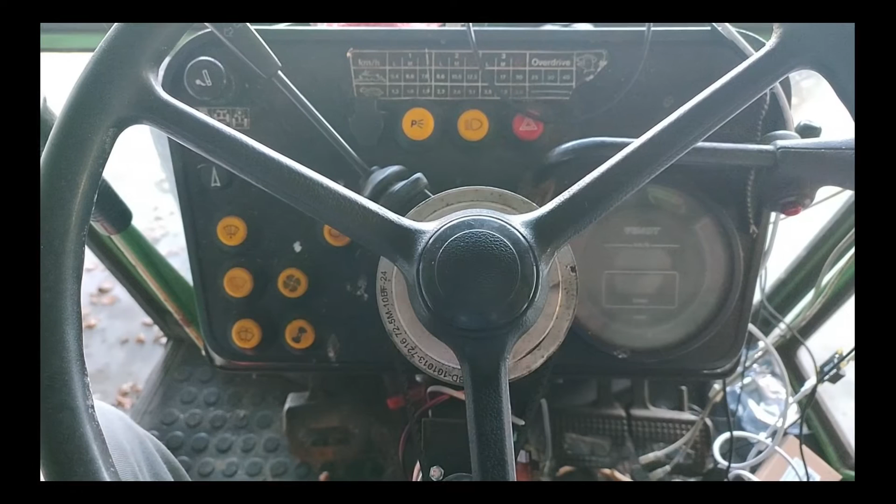Welcome to this tutorial for making a 3D printed gear for both CerealGPS and AgOpenGPS. The first thing I'm going to do is remove the steering wheel. This way it's easier to make the dimensions and later install the gear. As you can see, I've got a belt system in place right now, which also works great, but for this tutorial I'm going to make some 3D printed gears.

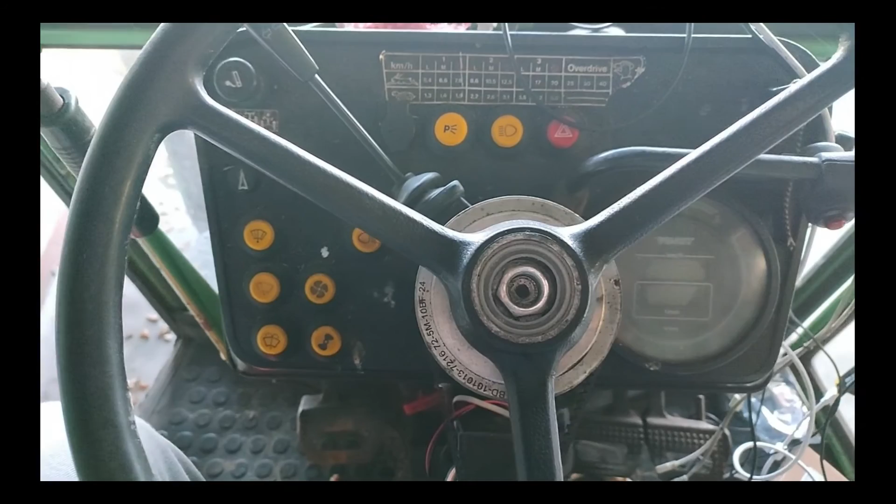The first thing to do when removing the steering wheel is removing the bolt in the middle, so that's what we're going to do. So here's the bolt. After removing the M32 bolt of the steering wheel, it's quite easy to remove the steering wheel. You can just pull it off. I already loosened it a little bit, like this. And now we've got our steering wheel removed.

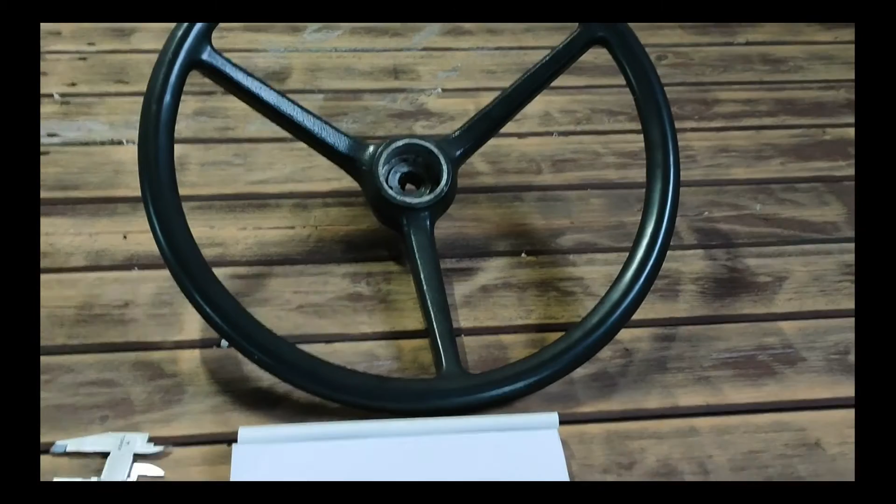So here we are again. We've got our steering wheel on the workbench. You can probably hear some 3D printing noise in the background - that's what you get when you do some 3D printing, I suppose. In order to measure the steering wheel, we've got a measuring tape and some calipers here. So the first thing we're going to do is measure the diameter of the steering wheel.

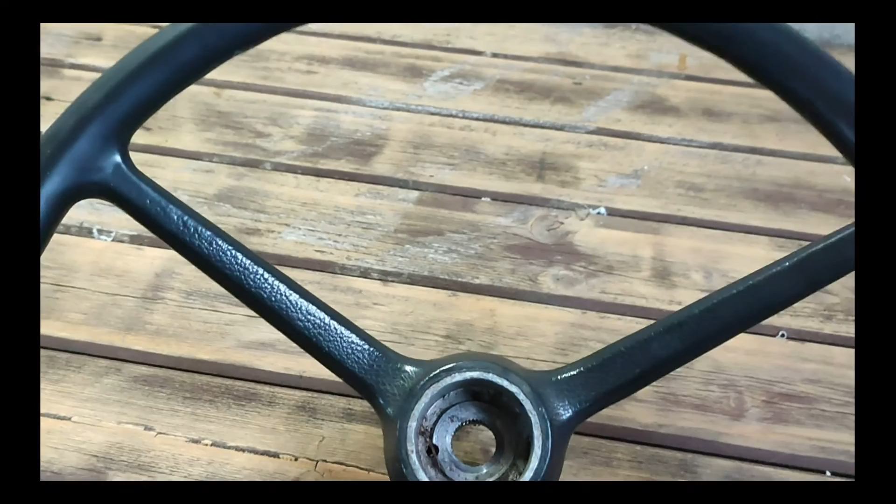You kind of get the idea what I'm going to do, and after that I make a drawing here on this piece of paper. So we can see that the outer diameter of the steering wheel is 40.5 centimeters.

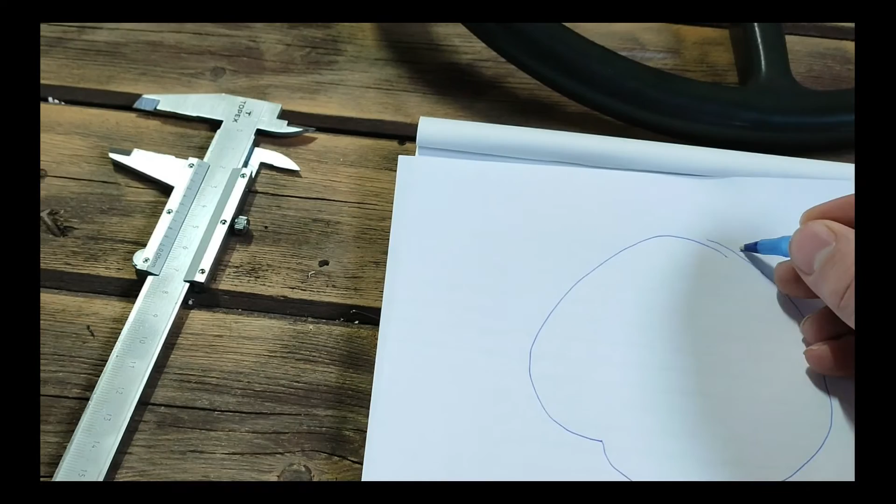So first what we'll do, we draw a big circle. I'm not a good drawer, as you can see. I'll just make it here and say 40.5. The diameter of the steering wheel isn't really important, but it's nice to have it - that way it gives you a good indication of how the gear is going to look after it's finished.

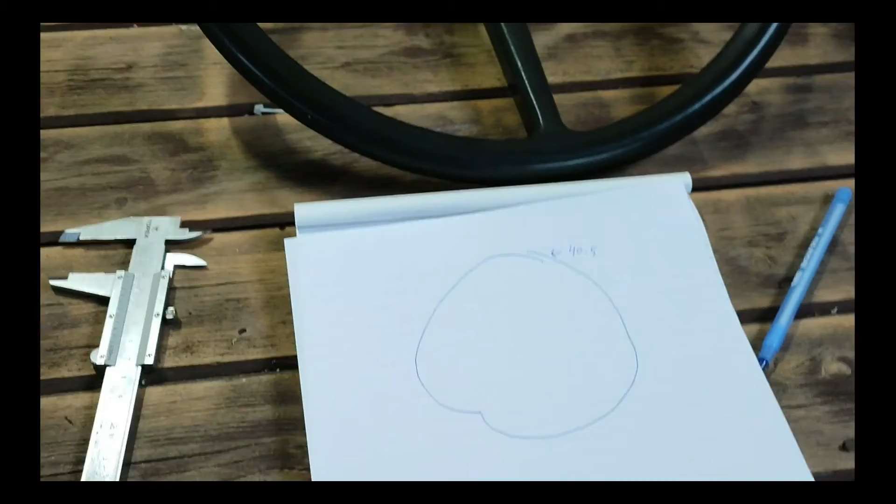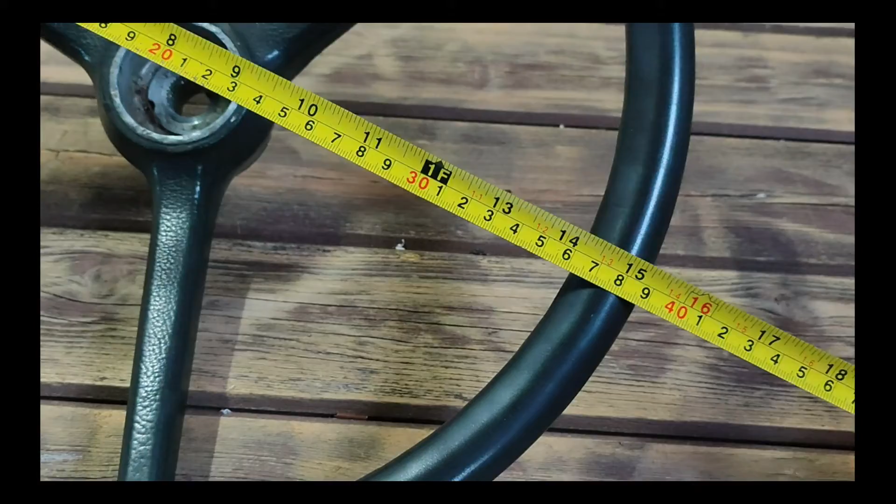So the inner diameter of the steering wheel is, let's measure that next. Let's see... 35.5. So the inner diameter is 35.5. Okay, we write that down.

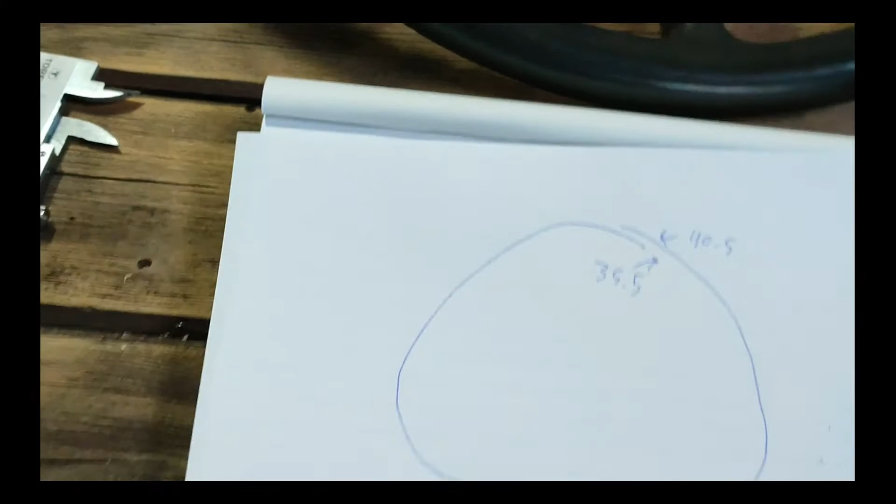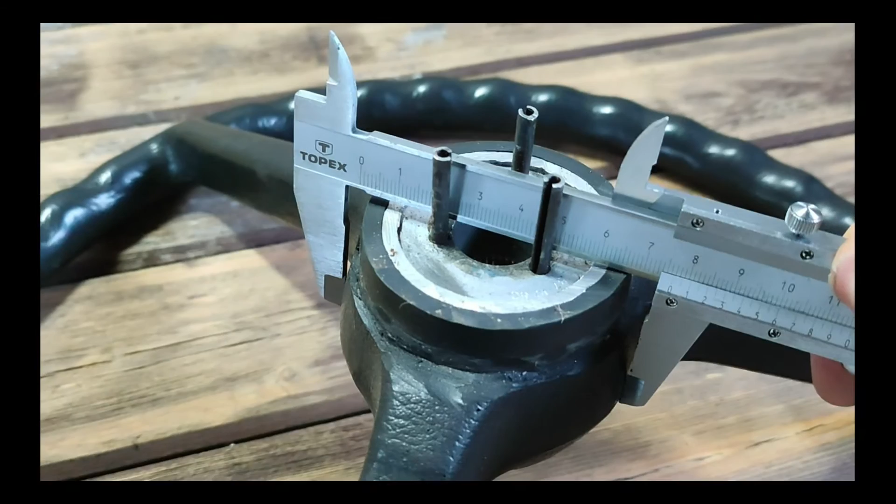So next thing we're going to do is draw the spokes of the steering wheel. This steering wheel has 3 spokes, and in the middle it has this cylinder shape. We're going to draw that in as well. I think it's best to measure it with the calipers. So if I put the caliper around it, it's easier to put it the other side around. I'm going to do a measurement. And here we have it - if I do the reading, 7.4 centimeters diameter. Okay, we're going to draw a circle in here.

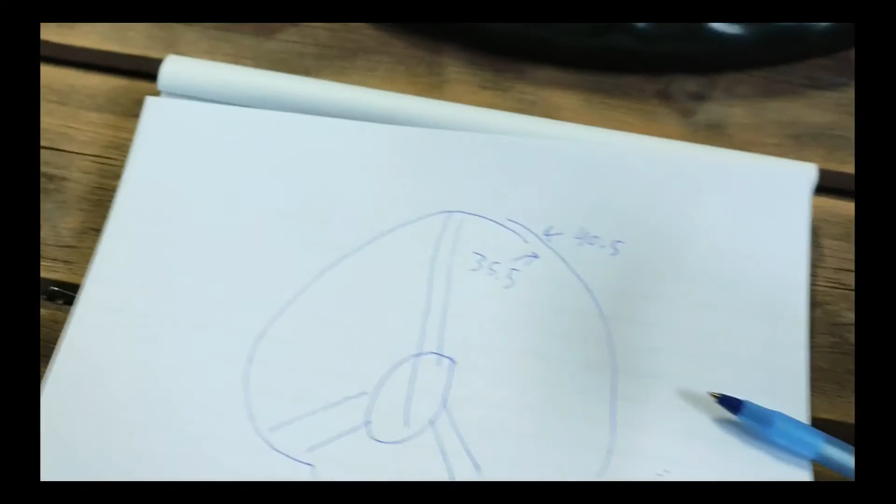Excuse me if it looks a little bit messy, but it's hard for me to film and do the drawing at the same time. So we've got our measurement here - it's 70... let's see... 74, okay.

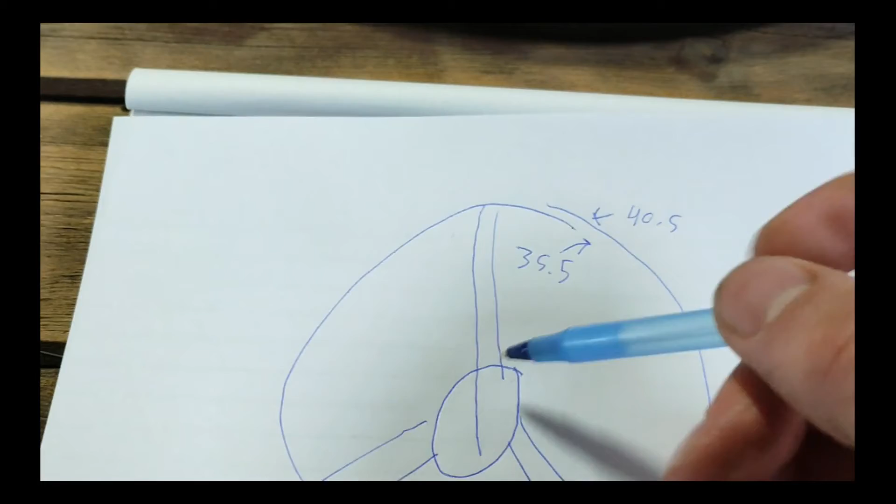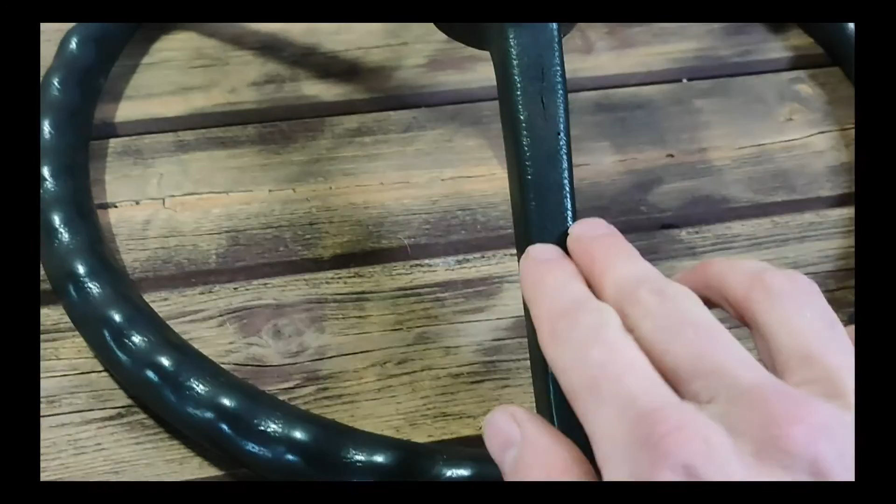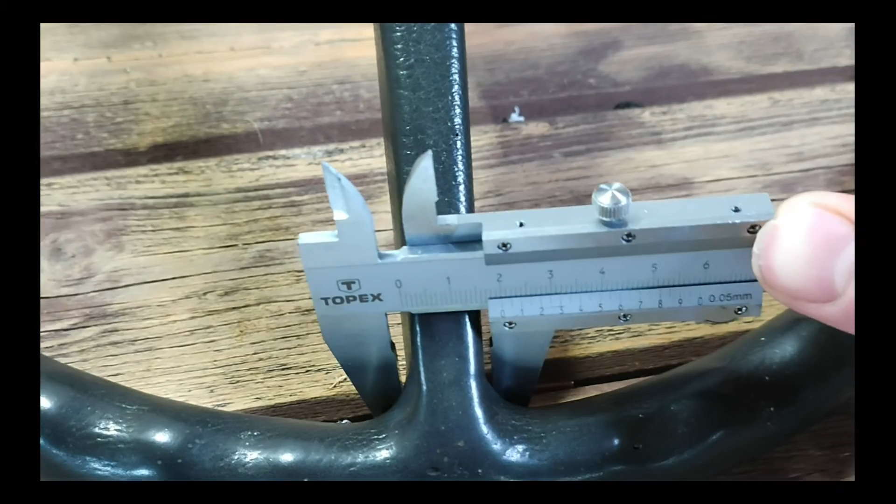Now what we're going to do is the width of the spoke - if we take a look at the steering wheel, we can see here on the top it's wider, and it goes smaller at the bottom, so it's kind of a triangle shape here. So what I'm going to do is measure the top. It's 2.5, and at the bottom it goes down to 1.5. So it fits in 1 centimeter, okay? So 2.5, 1.5. So at the top it's...

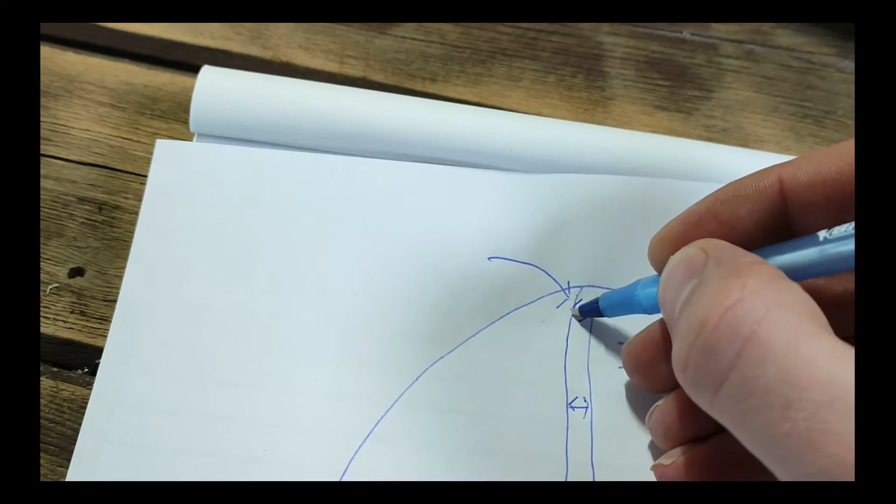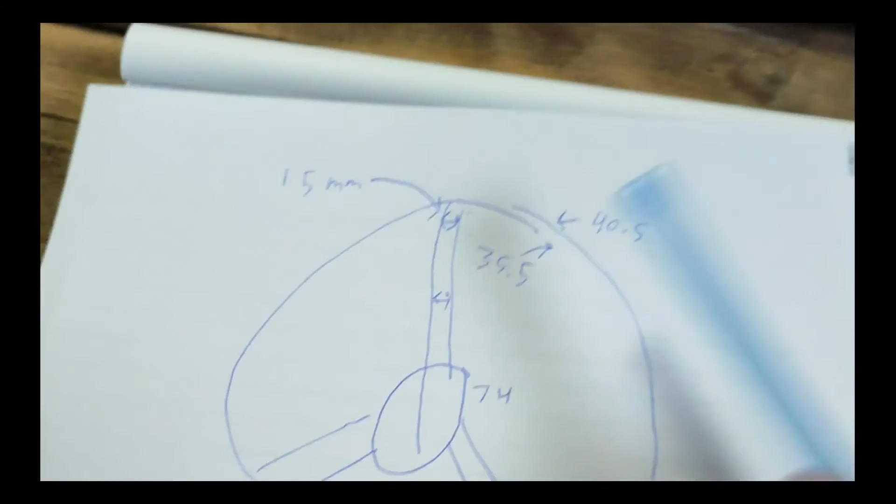This is not the official way to do a mechanical drawing, but it really is the most easy way. I also use two measurement types - I have centimeters and millimeters, but you probably know it. I can also write it next to there. So okay, so then we've got the bottom here - this is 25 millimeters.

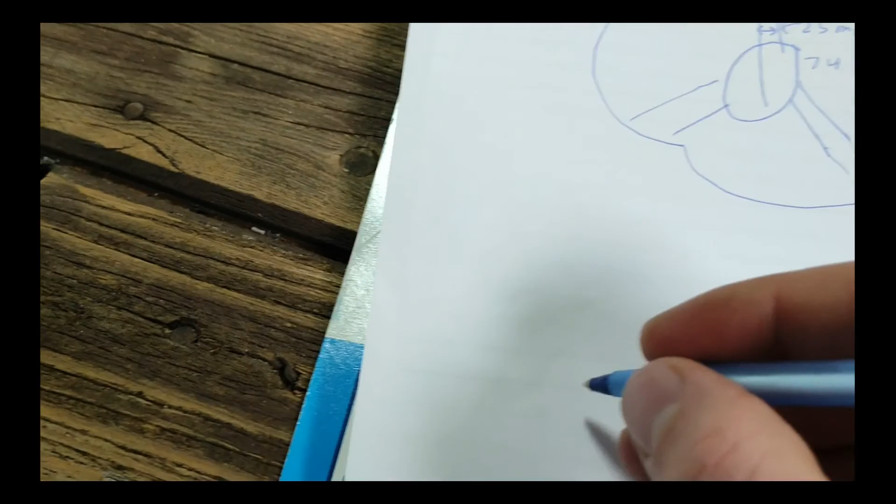I mean millimeters, okay? So in order to measure the angle, we do the following. We have the thickness of the grip, and I put my caliper around there. If we read the thickness, it is 2 centimeters, okay? So we're going to draw a triangle here, going down, and then here we have this thing, and that's 20 millimeters, okay?

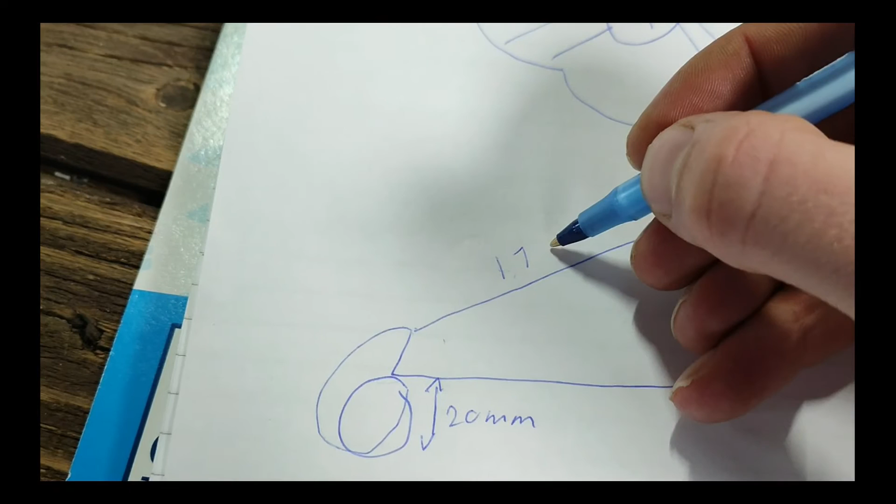In reality, this would be flat, so it would be more like this, okay? And we have this measurement - it's 170 millimeters, okay? And then we need to know this height, okay? It connects like this on top, it flattens out here, and then we want to know this height, and we can calculate the angle, okay?

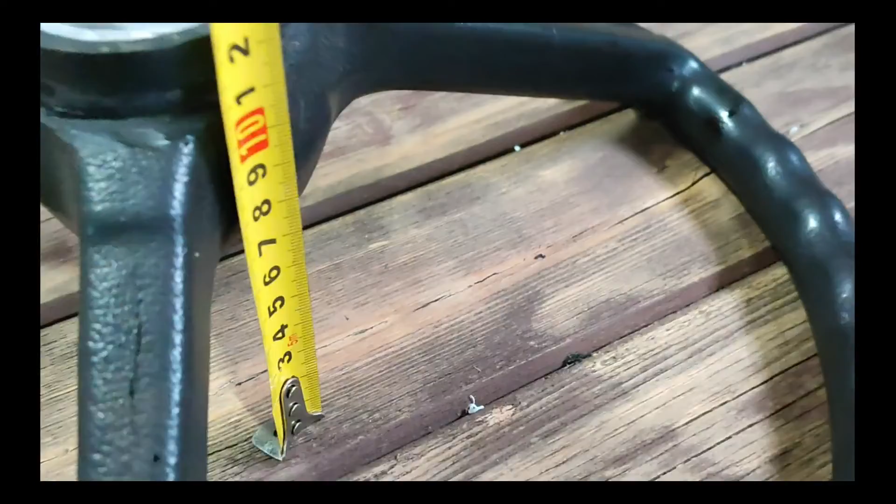The height of the steering wheel is 10.5 centimeters. So, 105 millimeters. Okay, so now we took all the measurements of the steering wheel that we required.

If you removed the steering wheel from the tractor, you can also take it to your desk when making the drawing for the gear. But removing the steering wheel isn't necessary, you could also do it without. But then you have to make more complex gears that connect together in multiple pieces, because otherwise you wouldn't be able to fit it around the steering wheel.

So it is also good to understand the smaller gear. We have one gear on the steering wheel and the other gear is on the motor, obviously.

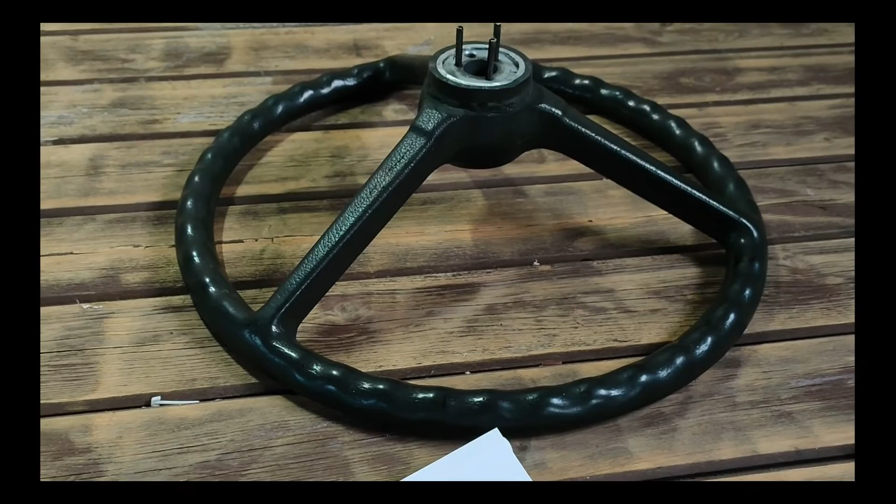Here I have the Phidgets motor that is used in most autosteer builds. The axis on there is 12 millimeters. I will also put a link to the mechanical drawing of this motor in the description. Make sure to check the gearing of your motor, because I think motors with different gearings have a different height gearbox. The gearbox is the thing on top here.

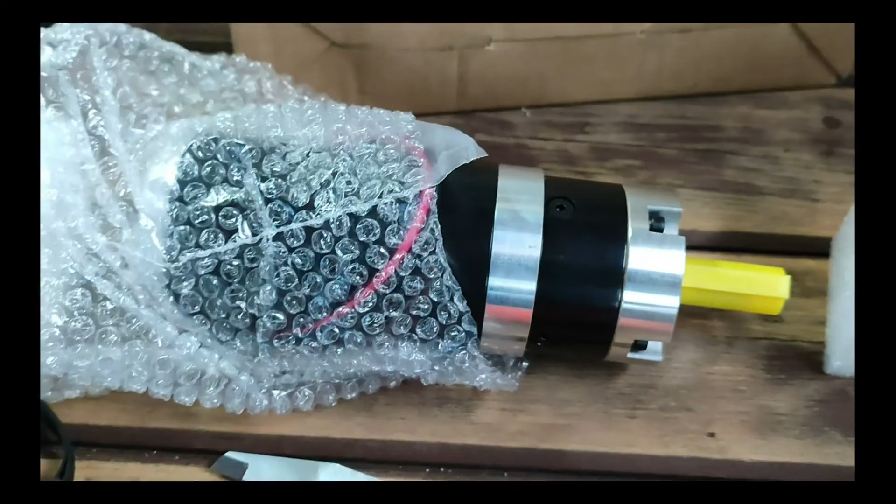So here we are at the desk. We got our steering wheel here, our measurements, the caliper, and the measuring tape. This way we can check the dimensions once we make a drawing.

Welcome to the second part of this tutorial on how to make 3D printed gears for CeREA and AgOpenGPS. In the first part we took the measurements of the steering wheel, and now we're going to make a 3D model of the steering wheel. The reason we are going to do this is because this way we can make a gear fit around the steering wheel, basically.

The first step we want to do is select the top position. Before you can select the top position, you want to use CAD software. In this case I'm using Fusion 360 because I find it easy to use. When we selected the top position, we select the Create Sketch button, select the top sketch, and we're going to draw a circle by selecting a circle in the top left corner.

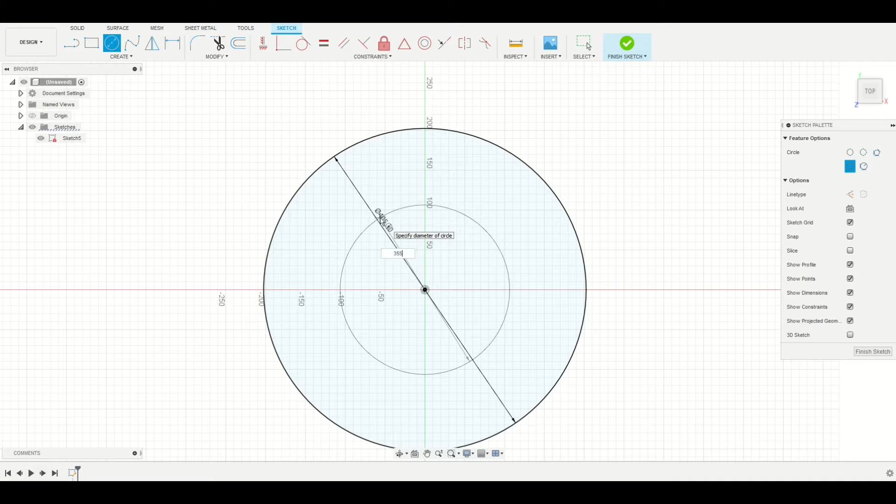So the outer diameter of our steering wheel is 405 millimeters. That's one. And the inner diameter was, let's see, 355 millimeters. So now we've got our basics of the steering wheel.

Now we want to enter the base of the steering wheel, the part that connects to the steering column, which was 74 if I measured. I will remeasure it again now with the caliper. I can see it's even wider, at 78. So I will make it 82 just to make sure that it fits, basically.

Now we are going to draw the spokes in the steering wheel. We'll start at the center, go to the side, connect it to the inner part of the steering wheel.

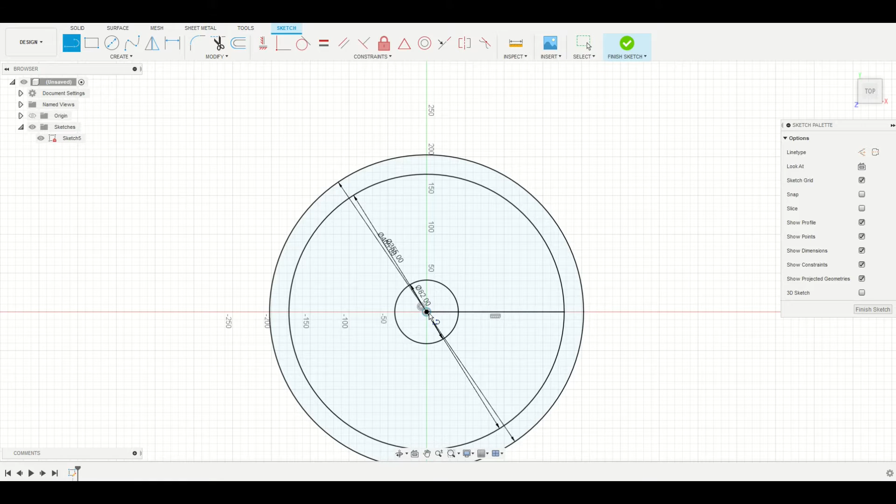Before we make the next line, we select the first one, select line, and then connect it to the inside of the steering wheel and put it at 120 degrees. This way it is divided within the steering wheel. We select the first line again, click the line tool, and do the same thing again at 120 degrees.

So we can also remove these lines so it's more clear. Now we have our base steering wheel with three spokes, basically.

The next step is to enter the thickness of the spokes. The top of the spoke we measured was 15 millimeters. I will add a little bit of margin, so I can do 7 on both sides, or I mean 8 millimeters like this.

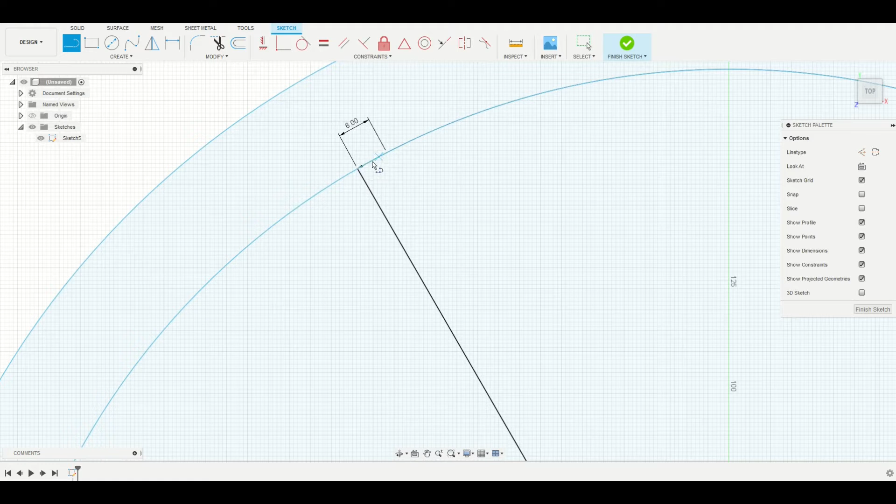And now I will do the bottom, which we measured at 25, which would divide it by 2 to be 12.5. But just to have a little bit of margin, I'm going to make this 14 to make sure that everything fits.

Because this is the side of the steering wheel on which you will fit the gear, it's important to have a little bit of tolerance on the measurements, so that way the chance of it fitting is much greater.

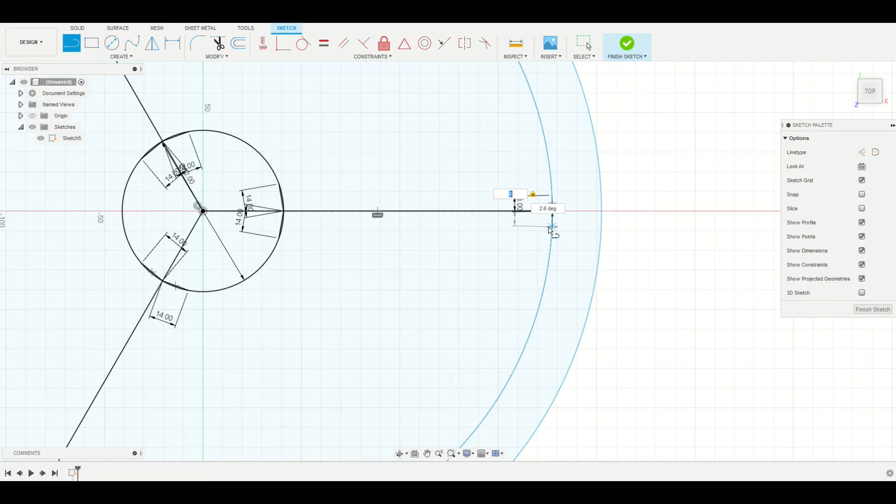So we will also do 8 on this side, 8 on this side. So I connect it up with the circle that we created. We can see if I move it around that it makes a blue line, so that's where I connect it. We will make this 8, we will make this 8.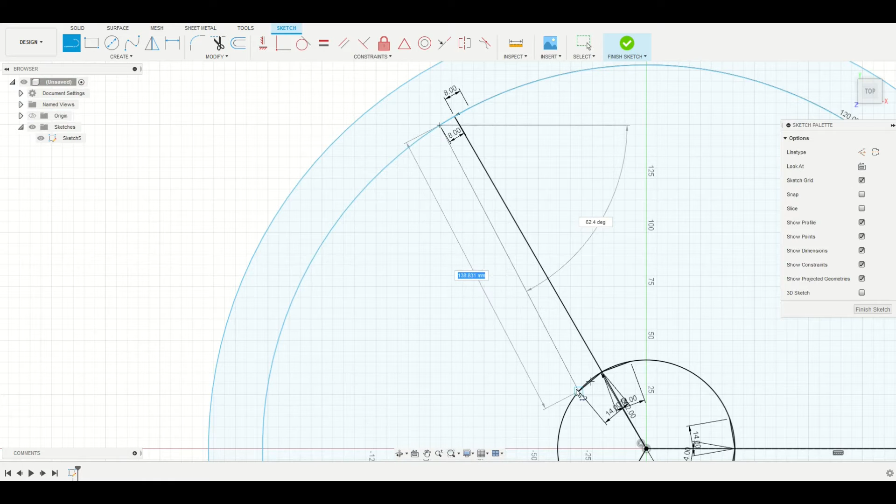Okay, now I will connect the points up and draw the spokes. You can see the blue circle, that's when it connected up properly.

So to check if everything went correctly, I'm going to measure the profile area, which you can see in the bottom right corner. All three are the same, so this way we know that each spoke is identical and that everything is done correctly. So the next thing I'm going to do is create a square around the spokes, because the spokes narrow down to the top, when they connect to the grip.

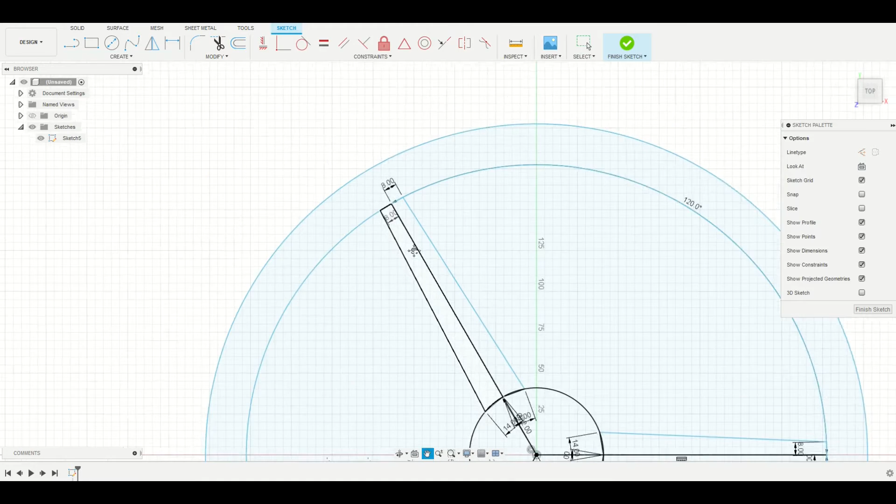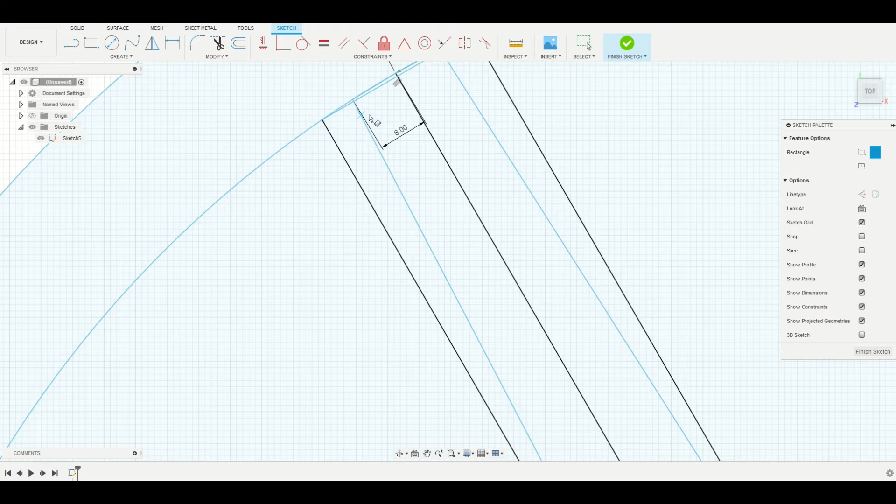And if we enter the angle of the steering wheel, we don't have a straight bottom basically. I will explain it later, but I select rectangle from create, then a 3-point rectangle, 1, 2, and then connect it to the bottom. Like this, I think it's good. Yes, and then 1, 2, and then 3. 1, 2, to the bottom, 3.

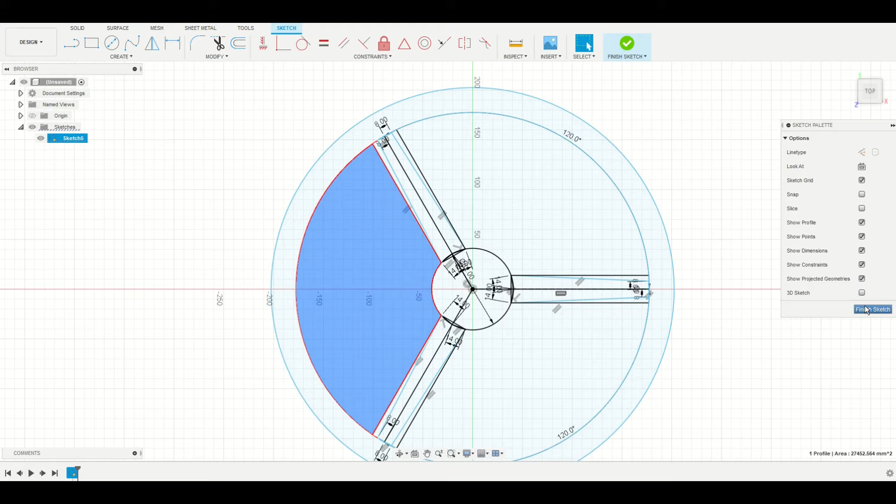So right now we've got our steering wheel with squares around there. We can check the profile area again. It's almost identical. Well, the difference comes from the way we draw the squares not being exactly the same, but that isn't really a big problem. We press finish sketch, and the next thing we're going to do is extrude our profile. We will do it like this. Select all the profile, all the areas, with the left mouse button and holding the shift key.

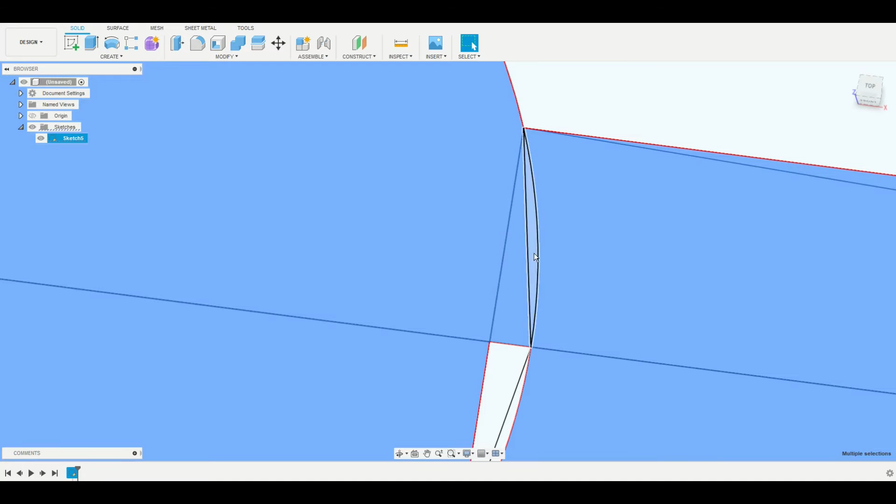So now we've got the base of our steering wheel selected, and we want to extrude this profile. We can do it by pressing the extrude button on the top left corner. So the height of our steering wheel is 170 millimeters. Actually it's 130, but I add 40 millimeters for a shaft, which I will clear out now.

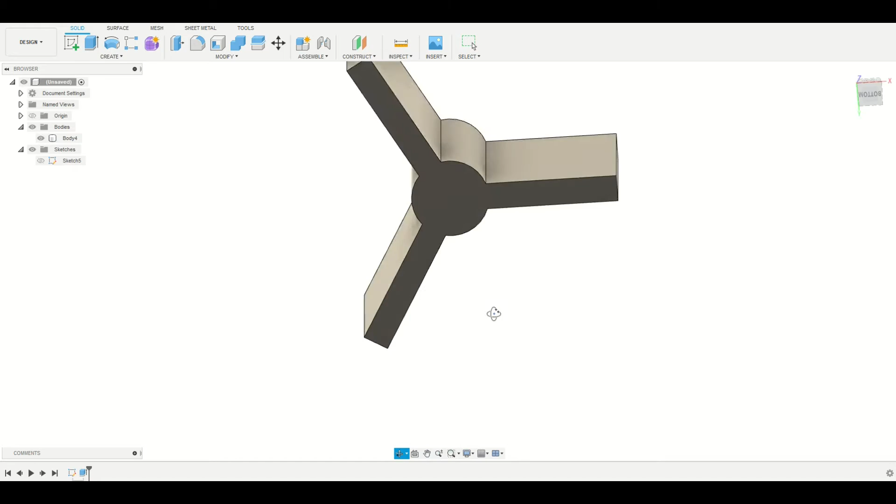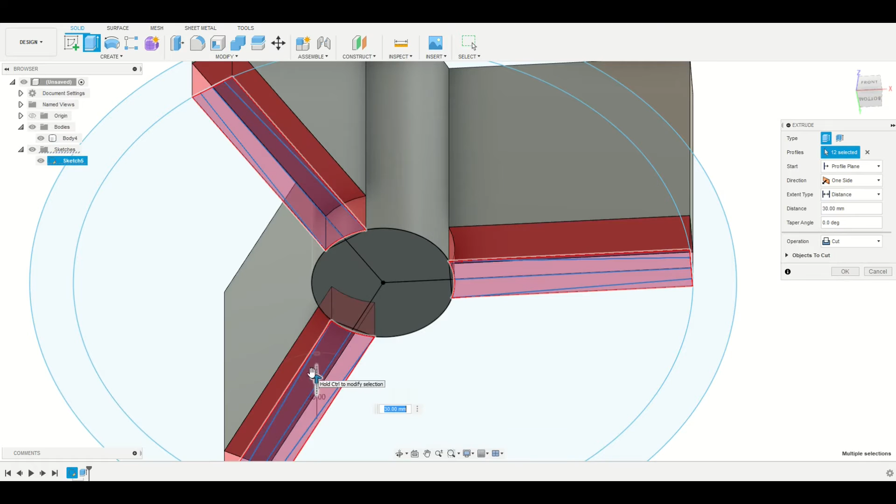We can re-see the sketch by clicking the little eye icon here, and we will select the spokes of the steering wheel like this. And when we select those, we'll go to the extrude again, extrude it up to 30. Okay, so now we've got the basis of our steering wheel, as you can see.

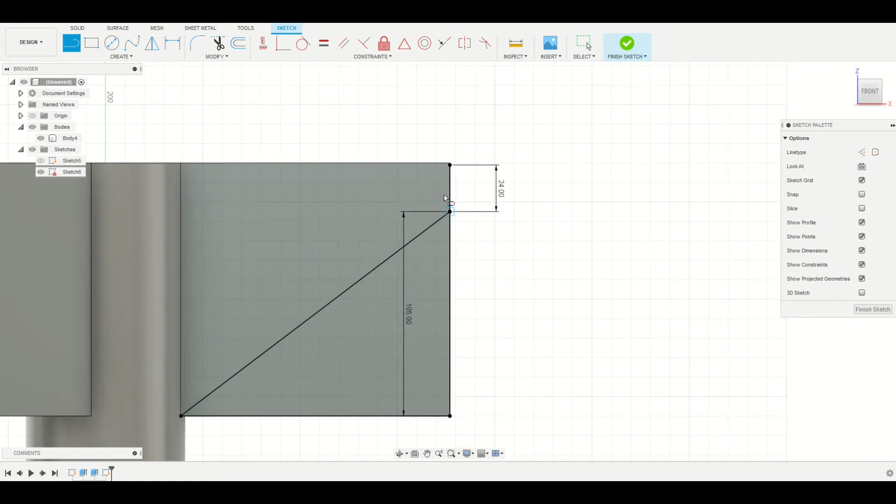The next thing I'm going to do is draw the angle of the steering wheel in the spokes. Basically, the way I do that is by selecting the face where I want to make the drawing, and now select the create sketch button. The height of our spokes from the bottom was 105, so we select that, make a triangle like this, connect it to the bottom, finish it up. The height of the spokes was 24 millimeters, and now also do 24 on the bottom. And finish the sketch. As you can see, we can select the faces now.

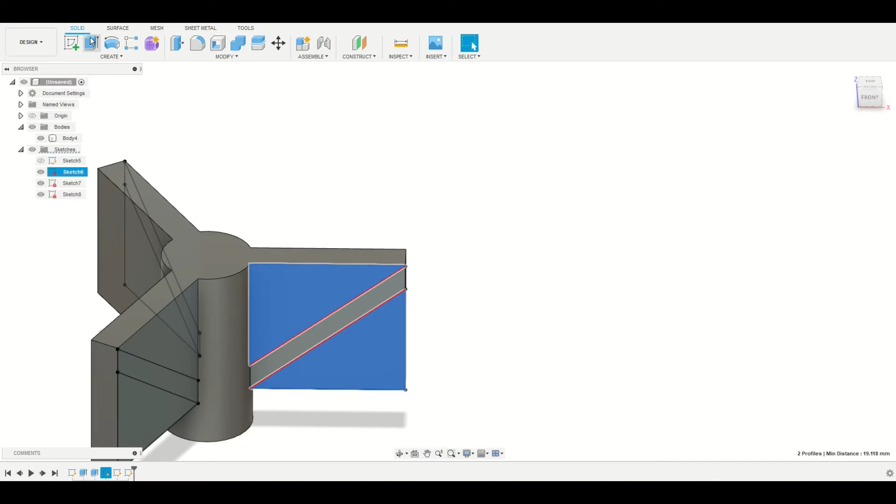So you want to do this on all three sides. After finishing up all the drawings, we should see our steering wheel with the spokes drawn into the body that we made. So we select the planes with our left mouse button and shift key, select the extrude, and then remove the material from the steering wheel. As you can see, you should see a spoke now. And now select, extrude, remove.

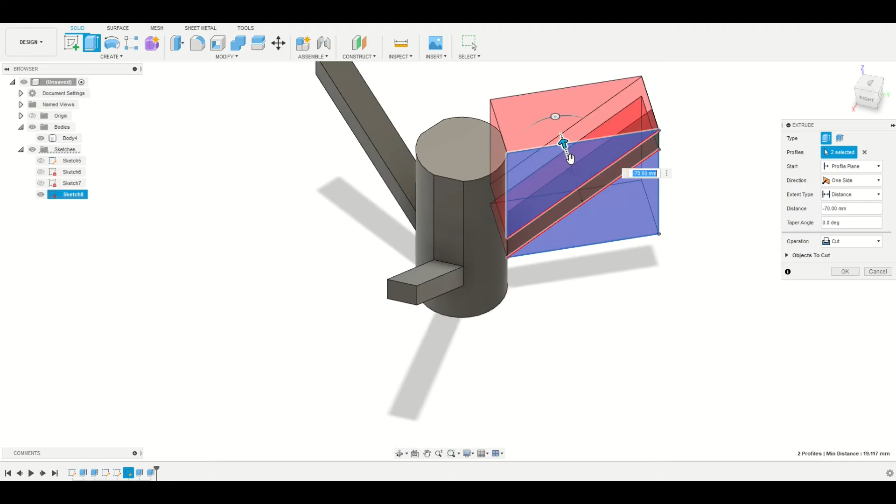On the left side, select, extrude, remove. Remove, yes. So now we have our steering wheel with square spokes, but like we said earlier, the spokes aren't square, but they narrow up in a triangular shape.

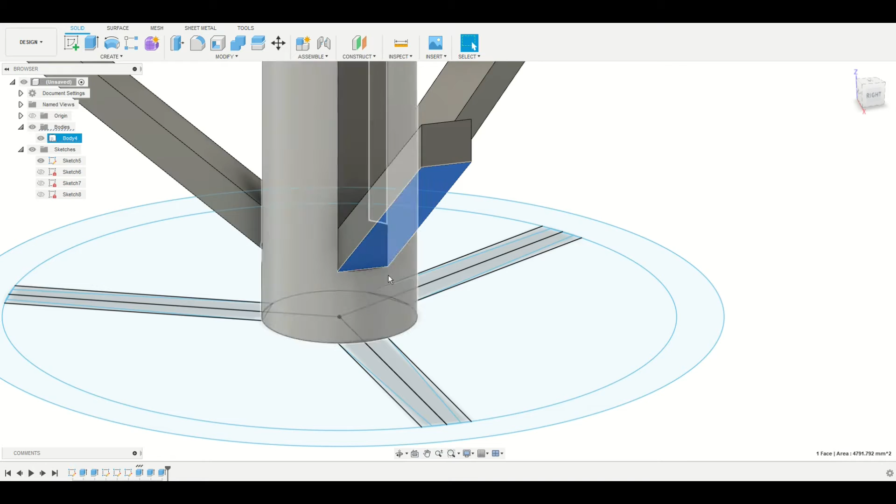So we want to remove the square that we created earlier. The way we can do this is by reselecting the sketch with the eye symbol, select it like this. The reason I made a little square is because if I hadn't done that, and we remove the material, then this face area won't be exactly flat on the bottom. It won't be square. You can try it out for yourself, but I found this the easiest way to make the spokes correctly.

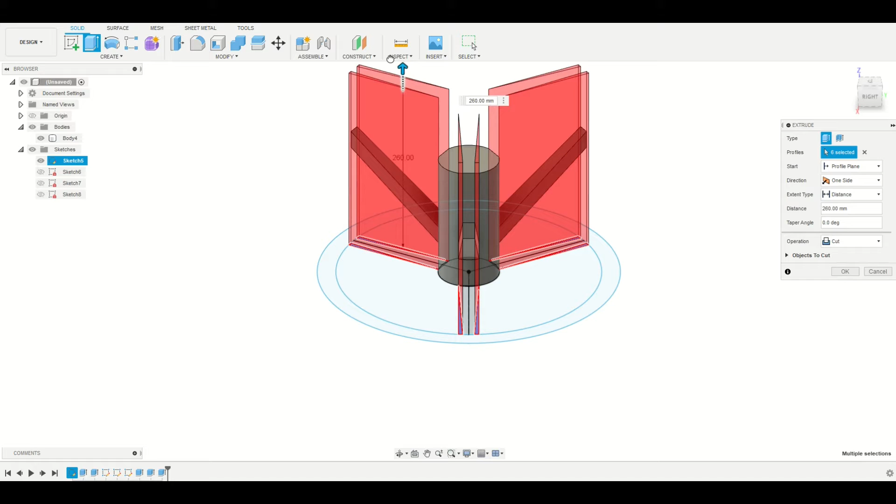So I select this area, and like this. Do the same on this side, hold the shift button. And now I select the extrude again, take it all the way up, okay. And as you can see, now we have a triangular shape in our spokes.

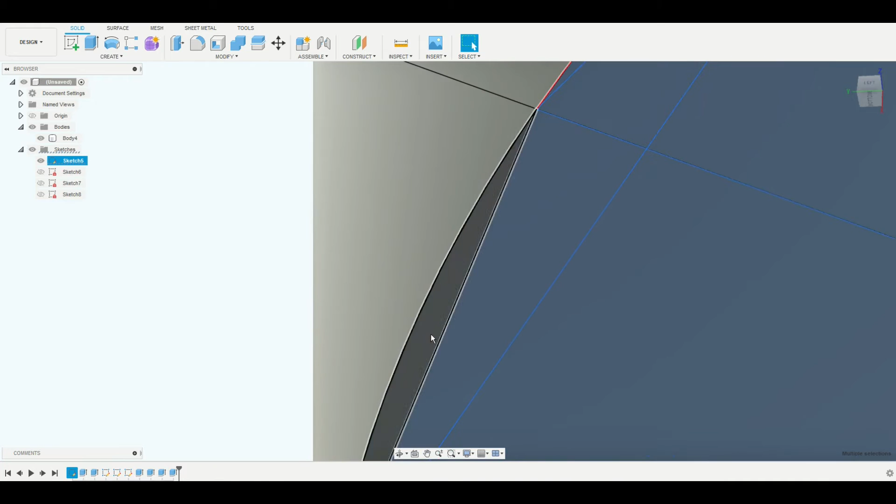The next thing that we'll notice is that the base of our steering wheel, and also here in the bottom, shows a small gap. And the way to fix this is by showing the sketch again, going to the bottom, hold the shift button, click all the areas, like this. There are probably much faster shortcuts to do stuff like this, which I'm not aware of. But this is easy to replicate, especially for beginners that want to make gears for their steering wheel.

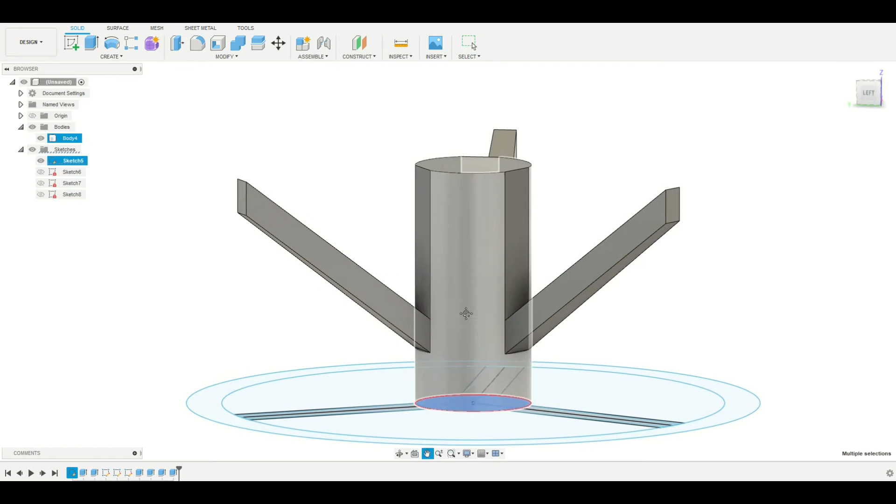They are not full-time mechanical engineers. Anyway, so we selected all the areas, and then we use the extrude button. Now we remove the base of our steering wheel, select everything again like this, 1, 2.

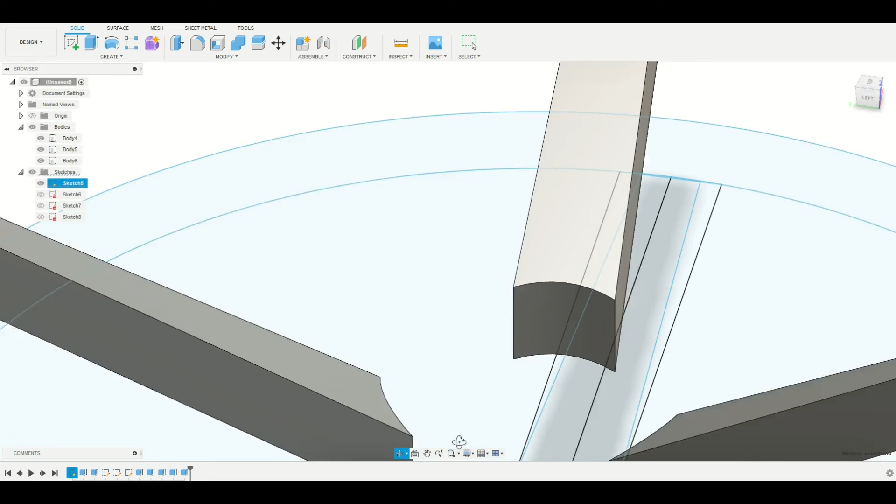So now we have everything selected. Zoom out a little bit, go to the extrude button, extrude the base again, like this. And as you can see, we have a perfect steering wheel with the spokes attached, without any holes in the base.

The next part will be the creation of the gear. We will do it, you can make the gear by going to Tools, Add-ins, Script and Add-ins, Stock.

Fusion 360 comes with a spur gear. A spur gear has straight teeth, but it's best to use a helical gear. In order to use the helical gear, you need to download the add-in and install it onto your Fusion 360. If you don't have that yet, you can search Helical Gear Fusion 360 in Google. It should lead you to the official Fusion 360 page, and you can install the add-in.

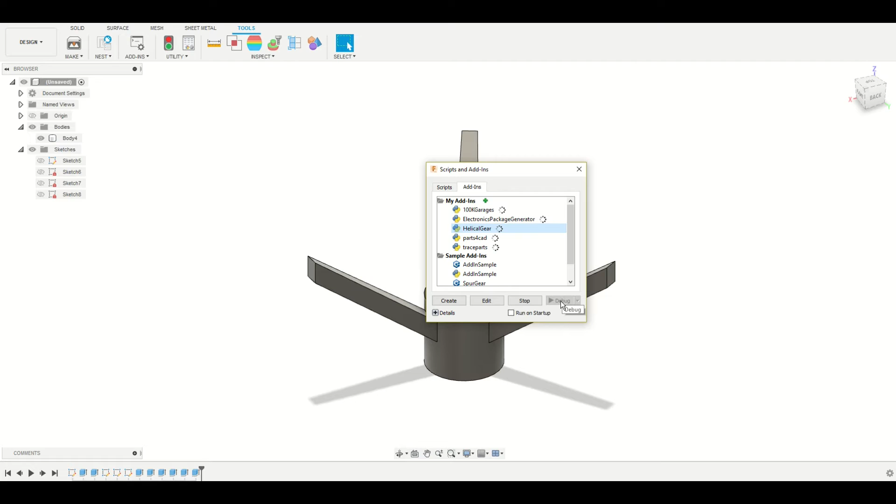So you can make helical gears easily yourself. As you can see, I already run the plugin, but if you don't run it yet, you select the run button here. And the next thing you do is go to Solid, Create Helical Gear. And now we're in the menu where we can make the gear.

I want a gear with 72 teeth, a module of 2.5 and a gear thickness of 20. Module 2.5, 72 teeth, and a gear thickness of 20. I click OK, it should create a gear for me.

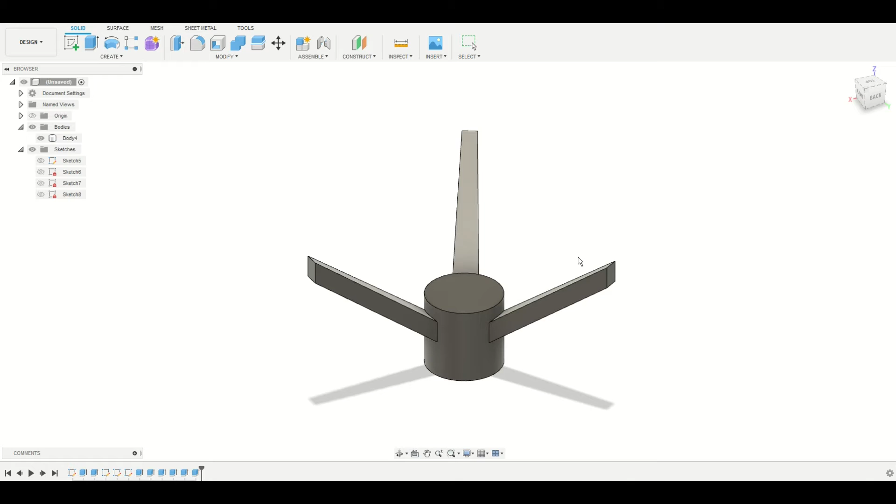So I'm aiming at a gear ratio of 1 on 6 or 7, and that's why 72 teeth is just a good amount.

So now we've got our gear and our steering wheel. Both are different bodies, as you can see, which is good. The next thing I want to do is select both in the left and align components. This way I know for sure that they are centered and the gear is in the middle of the steering wheel.

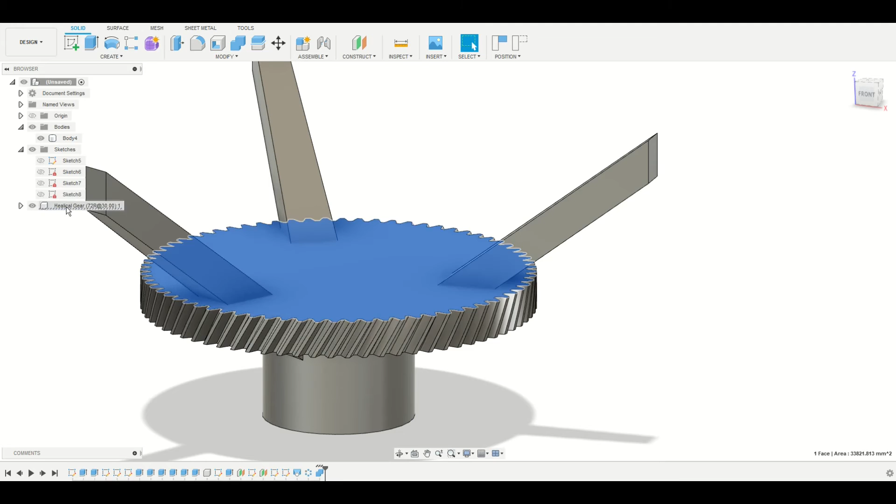As you can see, the gear is a little bit too high on the steering wheel. I select the gear. I can also select it like this, move or copy, and then lower the gear a little bit. Yeah, I could do minus 2 millimeters, should work out.

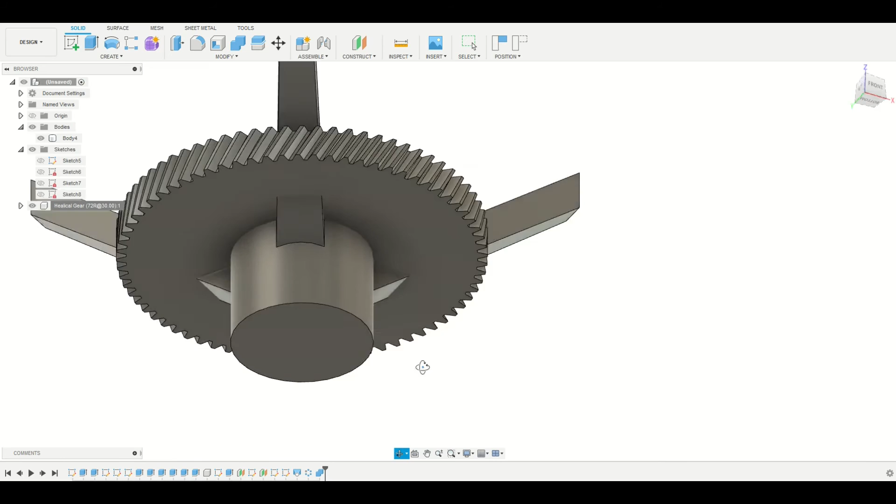As you can see now, the gear fits nicely around the steering wheel. Probably in reality the base is a little bit higher like this, but it doesn't matter.

The next thing we are going to do is combine both elements, and this is basically the reason why we drew the steering wheel. First we select the target body, which is the gear, and the tool body, which is the steering wheel. We select the option Operation Cut and select the Keep Tools option, and now we press OK.

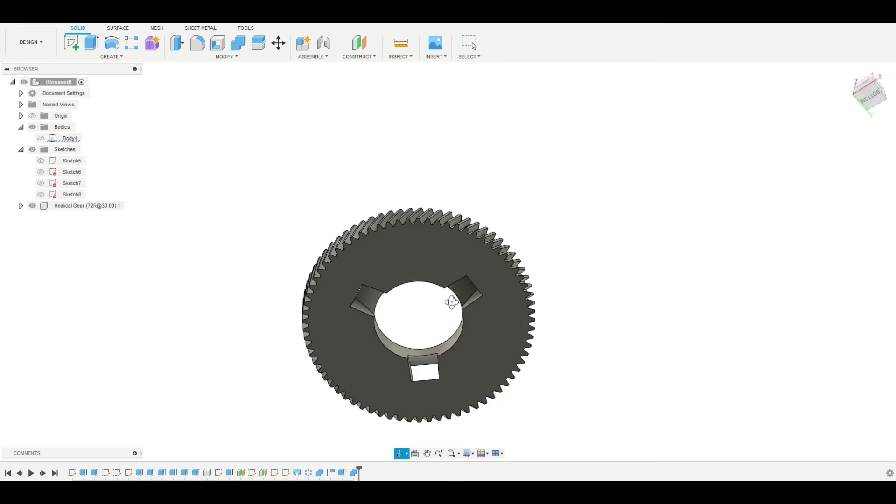It seems like nothing has changed, but when we remove the first body, which is the steering wheel, we can see now the cutouts have been made for the gear, which is the first step.

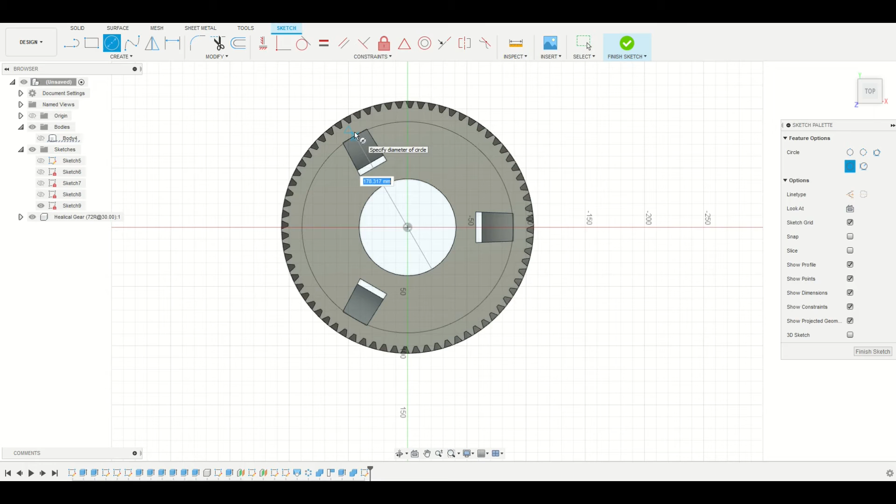It's probably easier to do it like this, connect it up like this. And as you can see, everything aligns perfectly, which is good.

And connect it to the inner gear and make sure that it runs parallel to the opening of the spoke, like this. Do this on the other side as well. Connect it up like this.

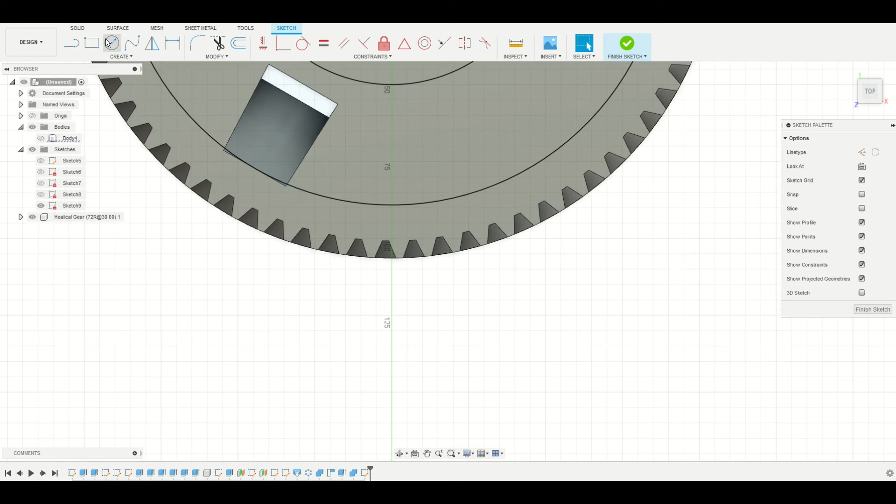So what we could do now is remove these pieces. We can do that by selecting the area, go to solid and removing the material.

Right now we have a gear that could fit around the steering wheel, which is really cool. The only problem being that this takes a long time to print and it doesn't really look that nice.

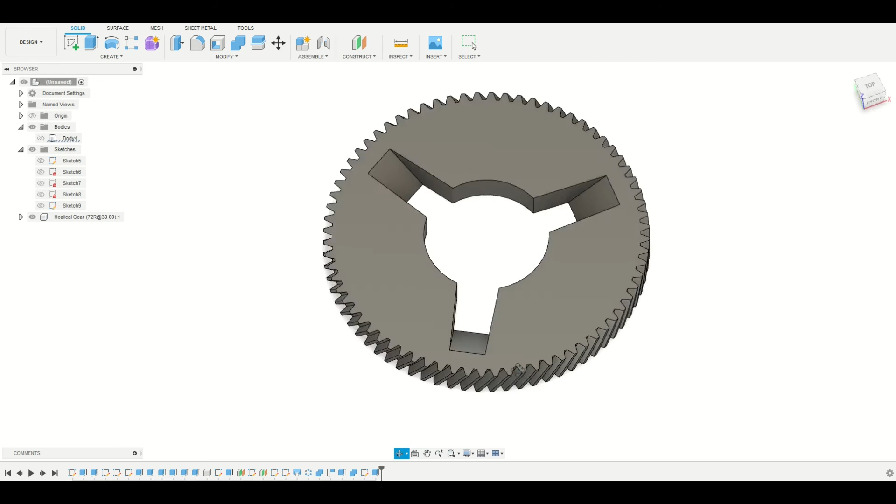So what we can do is add the sketch that we made by going to the timeline and press edit. Now I'm going to add an extra line. On top I will make it 10, and on the bottom I will make this 5. I could also make this about 7, should give the gear a little bit more strength.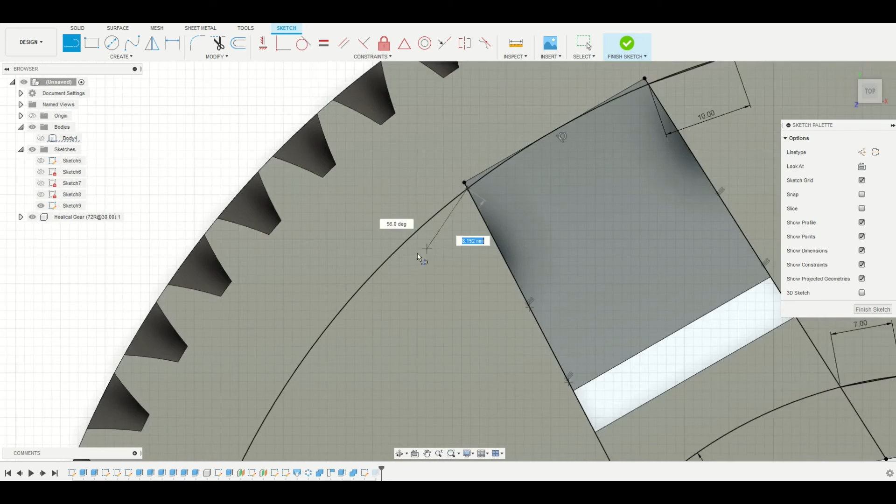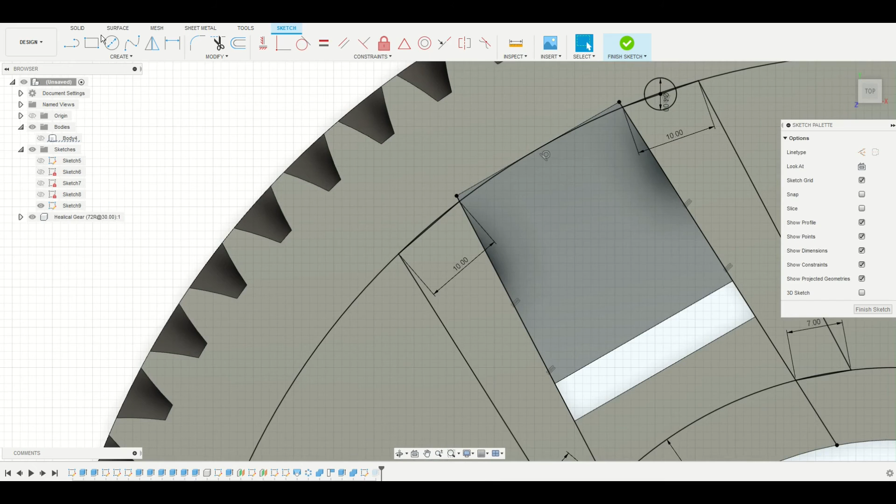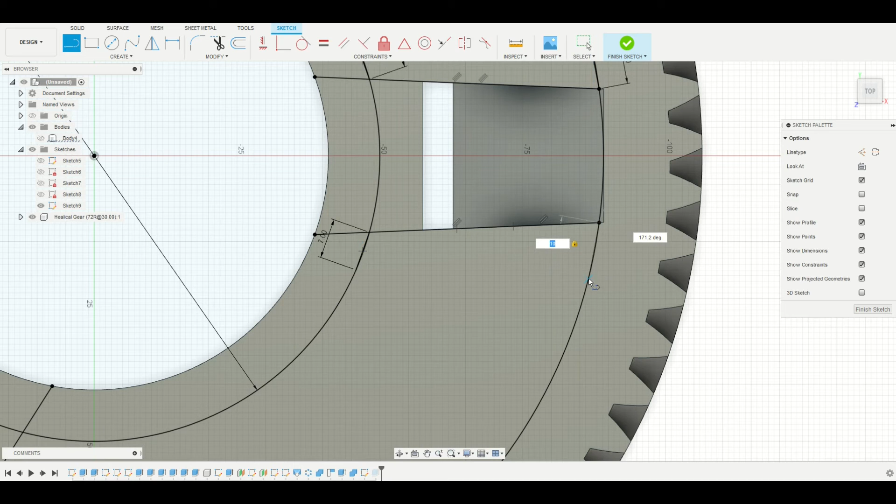And now do the same on all 3 sides. Connect it up like this. Make it 10 millimeters. 7 on the bottom. 10 like this. 7 on the bottom. 10 on the top.

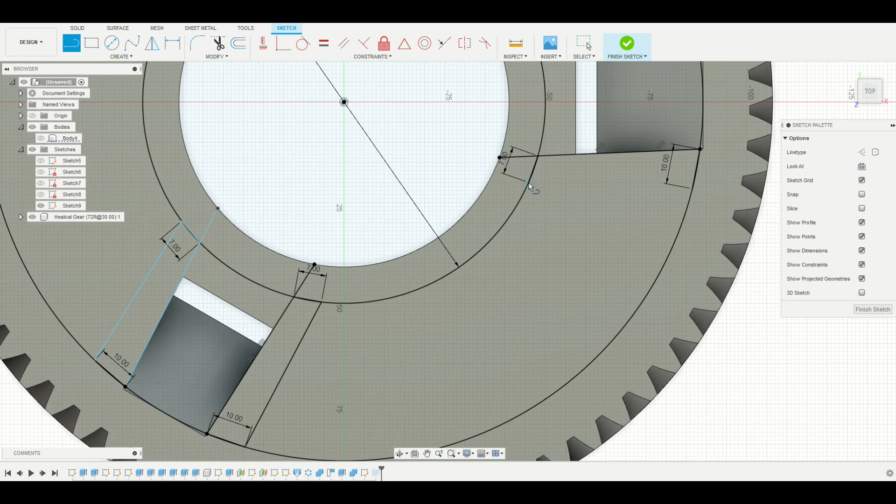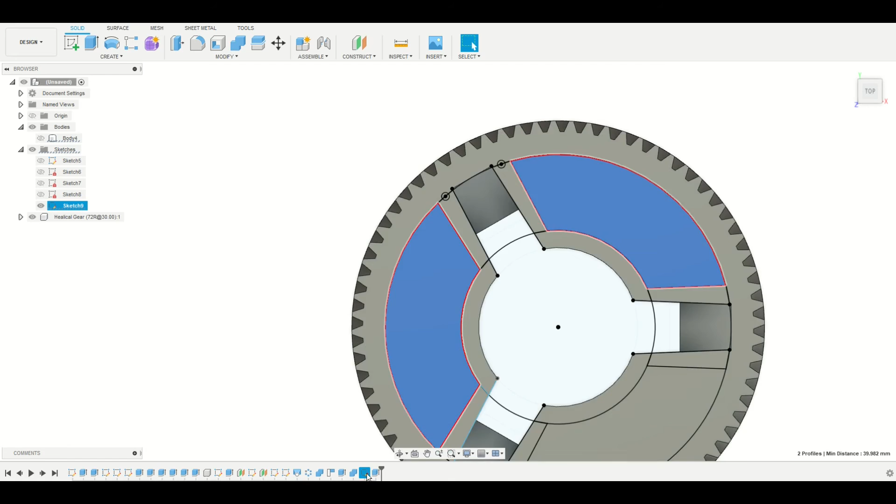Connect all the points together like this. Now create finish sketch. Oh, I want the last sketch. I select... oh wait a second, I forgot the holes on the outer part. So I made the holes 4 millimeters in the middle like this.

Click Finish Sketch. Select the areas again.

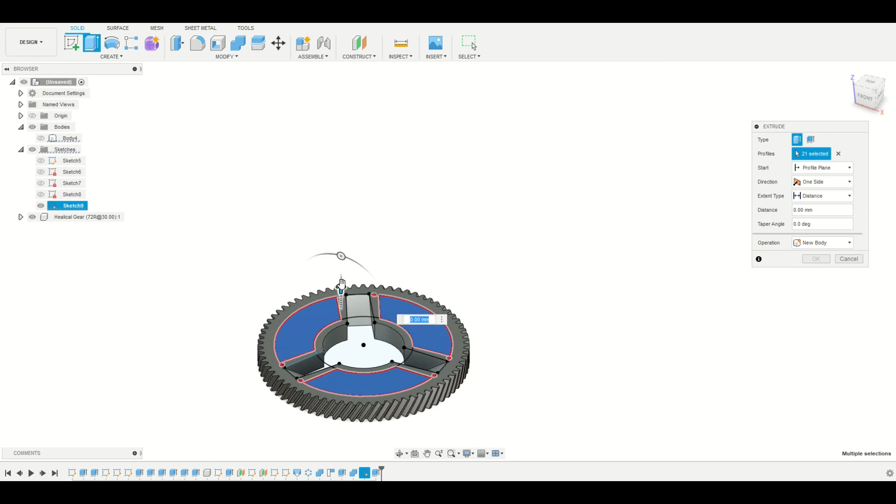Press the Extrude function, and now put everything like this. And as you can see here, we got our gear, and if we add the body, we can see the way it fits around the steering wheel. With the holes that have been made in the steering wheel, you can connect this easily with tie wraps.

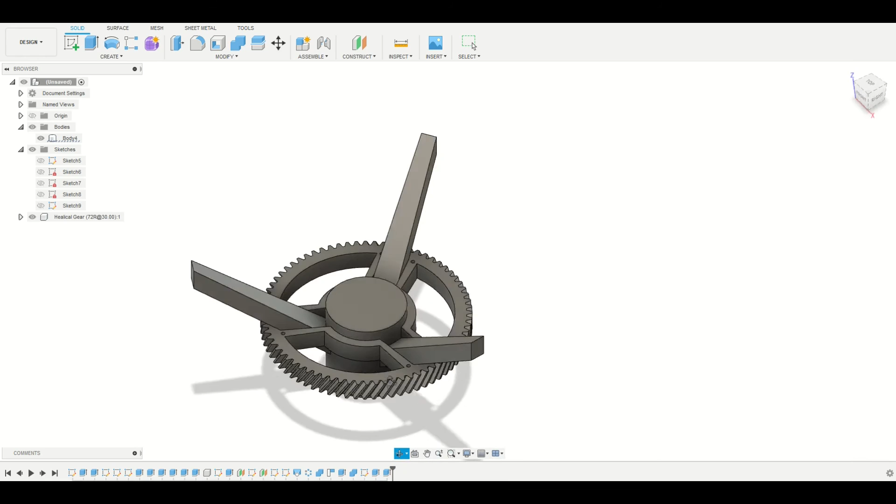Later, if you also have a little bit more experience, you could also make small brackets on top of the gear to make it fit more easily. What I would also show you is how to make a gear for the Phidgets motor. The way we do that is create Helical Gear.

So the next thing that we're going to do is create the small gear for the Phidgets motor. I'm going to make this 12 teeth, keep the gear thickness 20, the module 2.5, and make the handedness left, because otherwise the gears won't fit. I press OK. Now we should see a little gear.

It is inside, it is inside of the other component. I can move that around. I go to move or copy, drag it up and do it like this, just so you can see the way it fits.

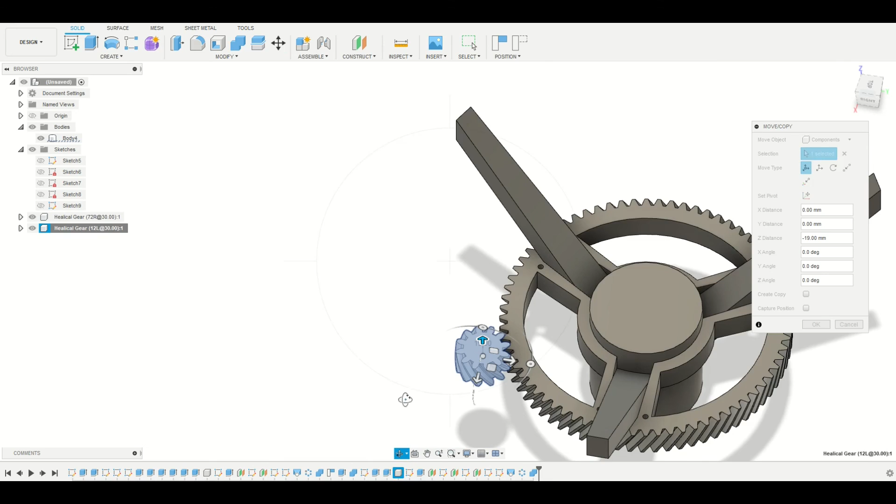Well, you get the idea. This is supposed to fit basically, something like this. Okay, so now we have our small gear as well.

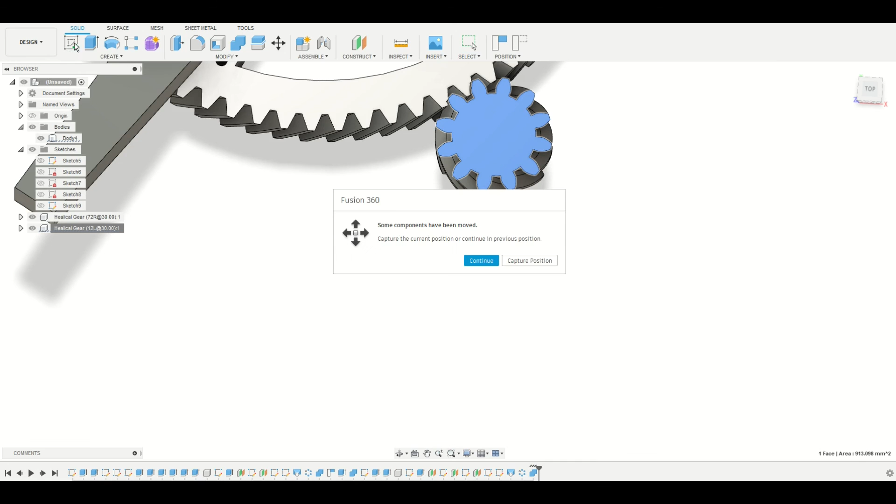What we want to do is create a sketch on top of it. Capture the position first. Go to the middle of the gear, the middle is here. Make a 12 millimeter hole, make it 12.1, so this way it fits more easily around the shaft of the gear.

The next thing that we want to do is create a hole that is a little bit bigger to put the clip around there. So this is the mechanical drawing of the shaft of the Phidgets motor. We can see that the diameter is 12 millimeters.

And that the length of the shaft is 28 millimeters, but it has these two engravings where you can put the clip around there, so the gear doesn't slide up and down. And this is about 18 millimeters.

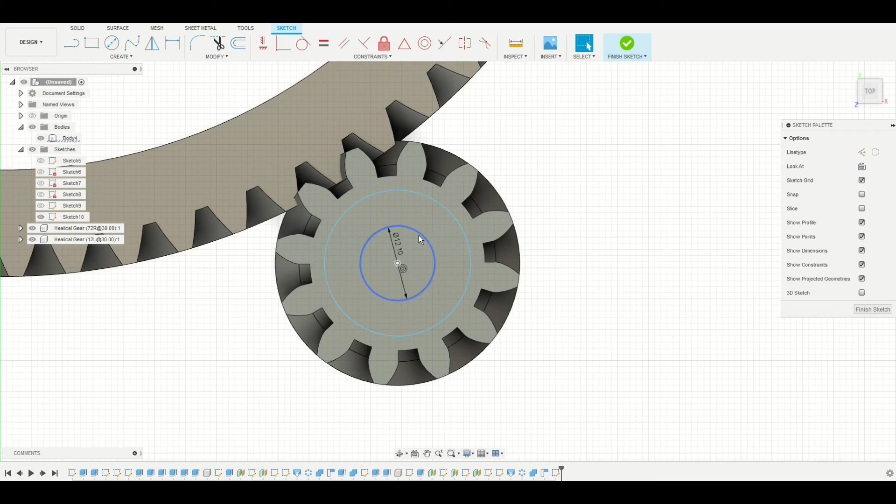So what we'll do is first create the hole like this. We'll just get this. Oh, wait a second, we also want to have the... I forgot to add the spline. I can do it like this, edit sketch, create a 3-point rectangle. The spline is 4 millimeters, if I'm not mistaken. So we make this 4.

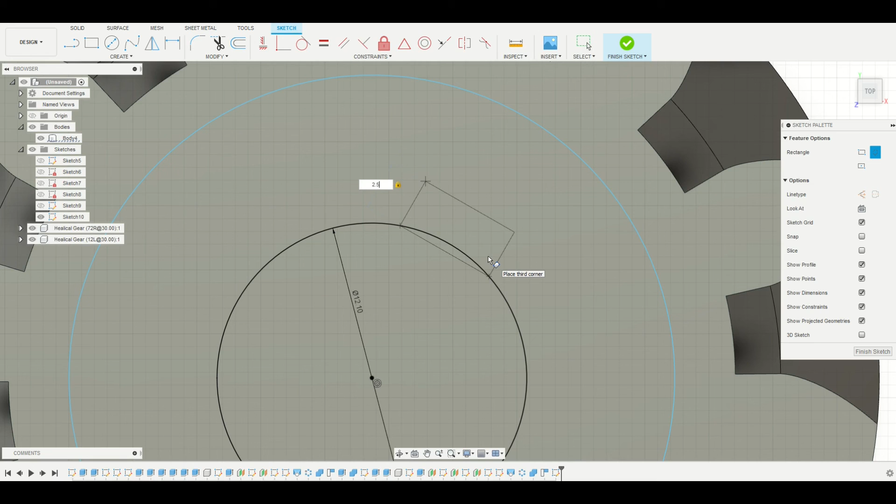And then, I think 4 is a little bit too much. 3, 2, 2.5, because half of it is in the... 2.5, I think this should fit. Okay, and now we finish the sketch.

We'll remove this bit. Get this down. And then also lower this about 3 millimeters. This way we can fit a small clip around it. So this is all that you want to do.

Now we got 3 bodies. One is the gear for the steering wheel, the other is the gear for the small Phidgets motor, and the other one is the steering wheel, which we don't really need anymore. Now we made our nice looking gear set, which will fit on this Fendt 300 Farmer series.

If you want a tutorial on how to print this gear, you can let me know. I hope this tutorial was helpful for you and allows you to create your own gears for your tractors.